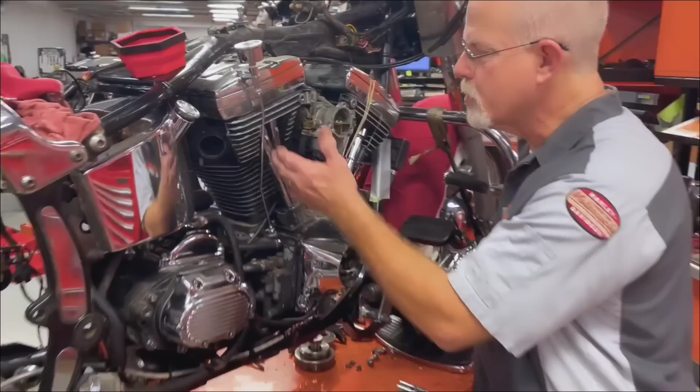Let me help you identify what you have so you have an answer for your service writer. Most big twins all have this type of push rod. Sportsters do not, but big twins do.

So we want to look inside here to see what we have. You take a flat tip screwdriver and install it here. Now we're going to twist this screwdriver and help push this down just a little bit, and it's going to pop out. We're going to remove this.

Now you have to be careful. All we want to do is look inside. We don't want to break anything such as O-rings. We have three O-rings, one here, and one here.

So I'm going to raise this up, and this O-ring I'm going to massage up. We are not going to use a pick or anything sharp to break this, because that means we have to do a whole lot more work on this motor. So all I'm going to do is work this up as high as I can. Now this will slide up.

Now I can look, and I am looking for either this or this. This here is a stock solid push rod. This here is an adjustable push rod. So now you have the answer. What do you have in your motorcycle? Well, I have a solid push rod or I have an adjustable.

It makes a difference, because if you have a solid push rod, we have to remove the pressure on top of the push rod so we can take it out so we can replace the cam.

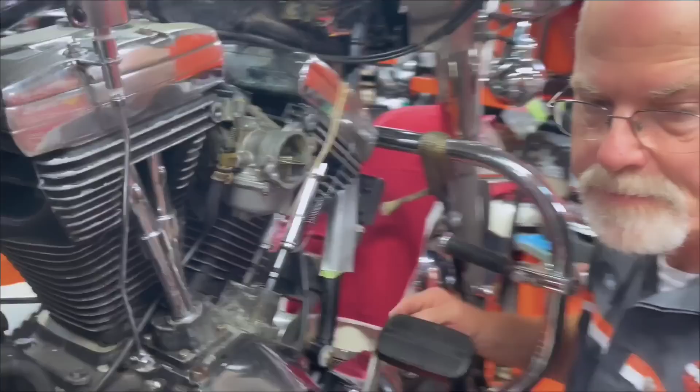There are a lot of manufacturers out there with a lot of different push rods, and each one is made to their specifications. Some push rods are identified: you can pick up your push rod and look, and it'll say, oh, this one says Rivera on it, and some have Screaming Eagle written on it. That helps you identify it.

Once you know who made it, you go online and find out what their instructions are. Today, all I'm giving you is a ballpark on how to identify your push rod and possibly how to adjust it once you put your cam in. Now, let's go a little further into why I need to know about identifying this push rod.

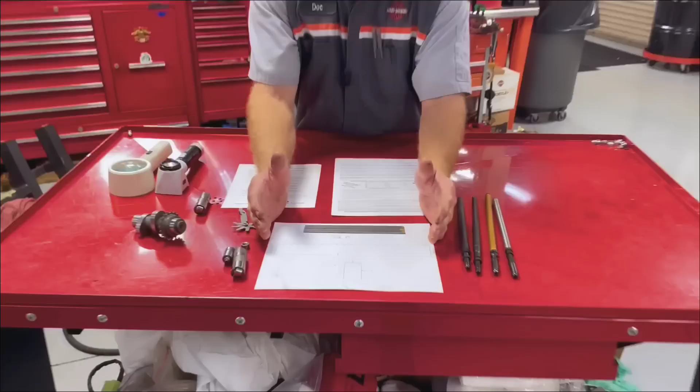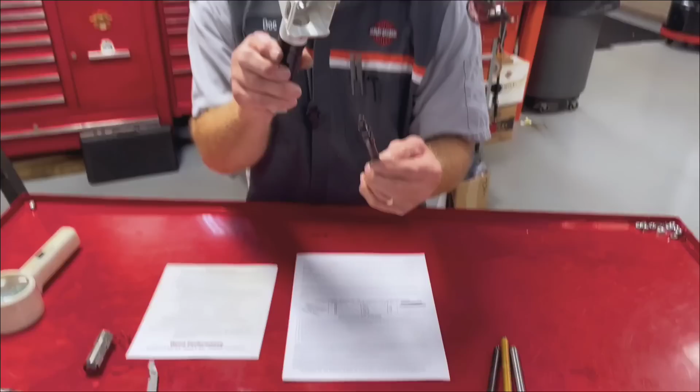I want to know how many threads per inch. Over 1 inch, I count the threads to see how many I have per inch. Why? I'll get to that when I explain how to adjust your push rod. It's important to know this. Now I need to count this. Being of the age that I am, I'll use this, okay? I can't see that well, but I've got a better, easier way.

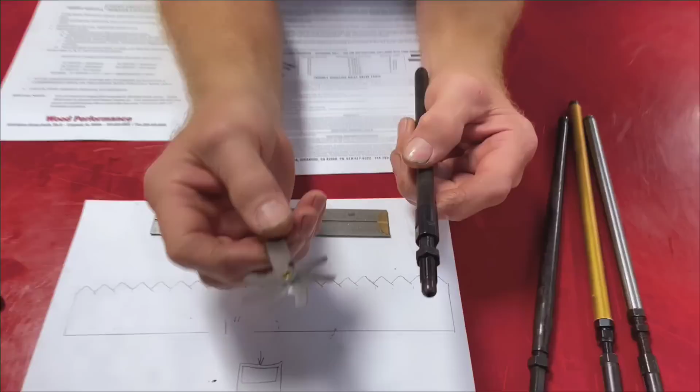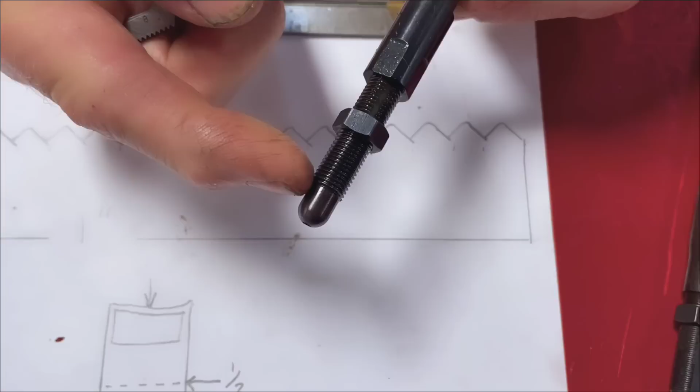If you're working on your motorcycle, you probably have a tap and die set, and in that set you have a pitch gauge. This is so much easier than trying to count. You take your pitch gauge, usually between 20 and 40, and hold it up to your push rod. No, that's not it... I got a winner, 20. So I have 20 threads per inch on this push rod. That helps me identify the push rod and how to adjust it.

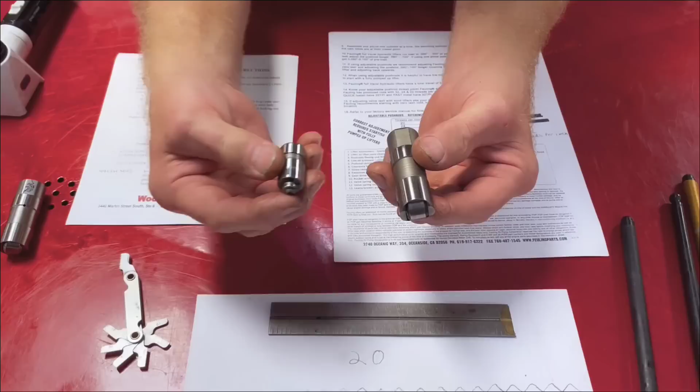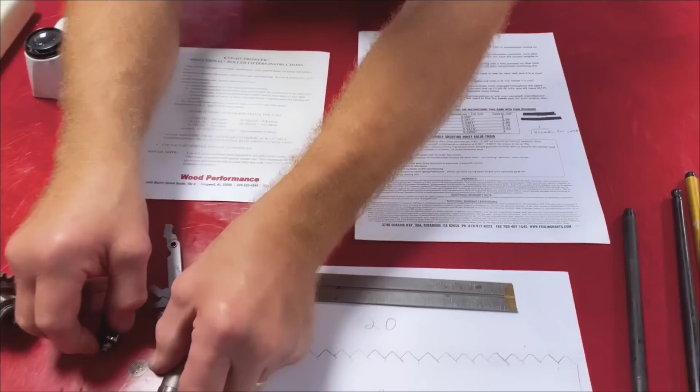What I am trying to do is get a hydraulic unit. This is very basic, but I have a floating piston in this hydraulic unit, and if you can identify the hydraulic unit, it helps you know how far to adjust it. But we're talking about a used motorcycle with no identification on the hydraulic unit. Most in the industry want this halfway in the hydraulic unit, so the oil underneath keeps the push rod at zero lash. To get it halfway, most manufacturers say there's 200 thousandths of travel in a hydraulic unit, and I want it halfway.

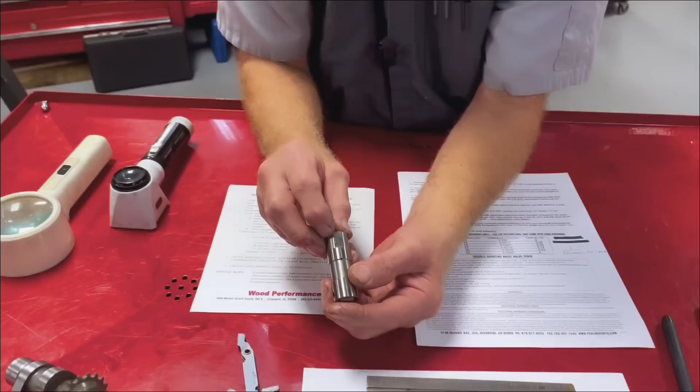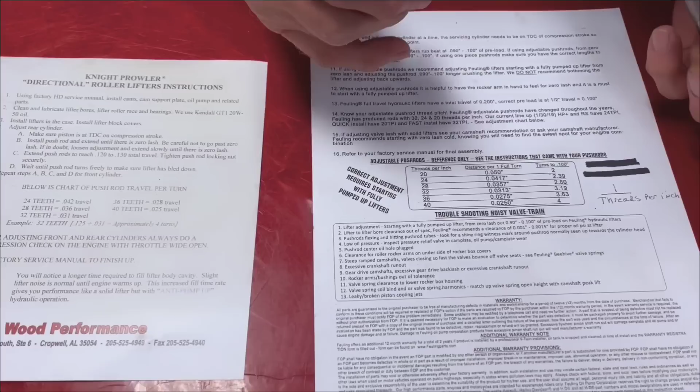Now, different manufacturers have a different halfway. Let me give you an example. I have a Bob Wood, identified by the Prowler on here. His instructions want it 120 to 130 inside the hydraulic, whereas over here Feuling wants 100. It'd be great if you knew the identification of yours, but we're going on the aspect that we don't know anything, so this is a ballpark thing.

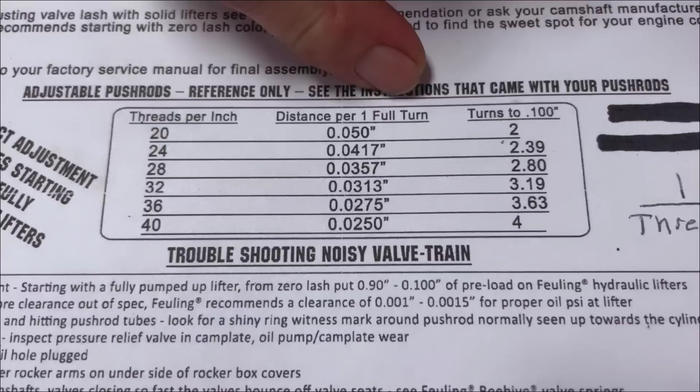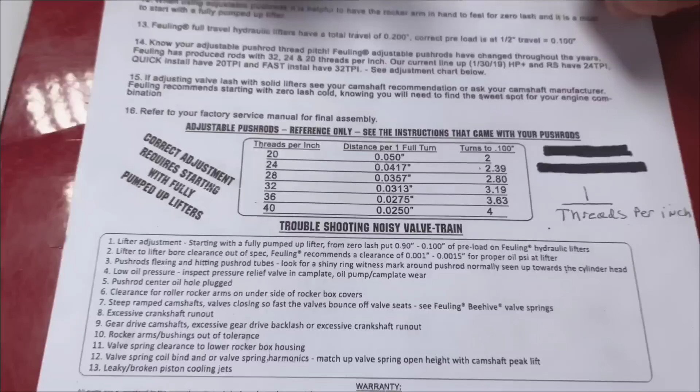We identified our adjustable push rod at 24 threads. That means the distance per one full turn of your adjustable push rod is 0.0417. That calculates out so, to get it to 100, I turn the adjustable push rod 2.39 turns. Now this is just ballpark. If you're a mathematician, it's 1 over threads per inch - you can do the math if you forgot this chart, and it will give you the same type of information.

Now, if you're an engine builder, I am not doing the big science thing here. There is so much to adjusting push rods - there has to be oil filled in the hydraulic unit, you have to have so much clearance on the cam lobe, and all this kind of stuff. That's a whole different video. This is just to help you identify what you have.

So when you go into your local shop with your cam, all excited, and say, I want to install this cam in my motorcycle, and he asks, do you have adjustables or solids? You say, I got adjustables. I even know there are 24 threads per inch on my adjustables. And he'll think, this guy kind of knows some information here.